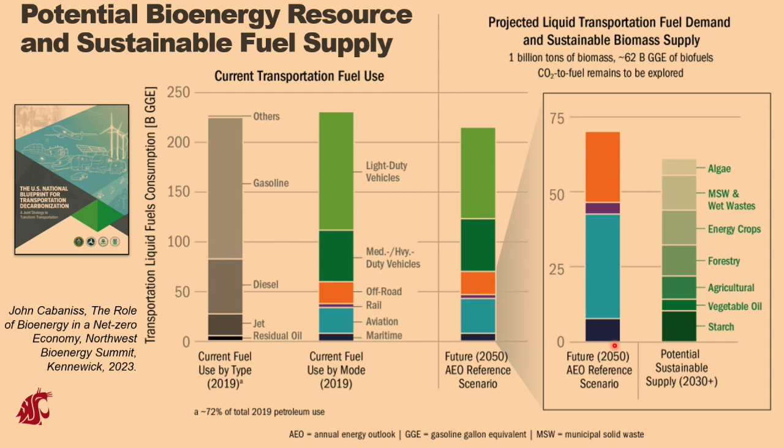And so this is stacking up a 2050 liquid transportation fuel comparison versus the amount of potential sustainable biomass converted into transportation fuels. Again, this is a lot of if, but it shows potential. So basically you can see where the biomass eclipses the combination of rail, aviation, and marine, but not all of off-road or diesel or gasoline. Okay.

So another thing that is really, really driving a lot of commercial activities within the US and Europe are the different regulatory practices. So the US passed the Inflation Reduction Act. If you're an engineer that cares about sustainability, the Inflation Reduction Act should be top of mind when you think about the rollout of renewable technologies across the US.

And that model for the Inflation Reduction Act uses carrots. It gives you a benefit when you reduce your carbon emissions, okay? So for every gram of CO2 you reduce for your SAF, you get a certain benefit for it. It's an incentive-driven program. European models are a bit different, where sticks are typically what's referred to there. So you have to pay if you do not meet certain targets.

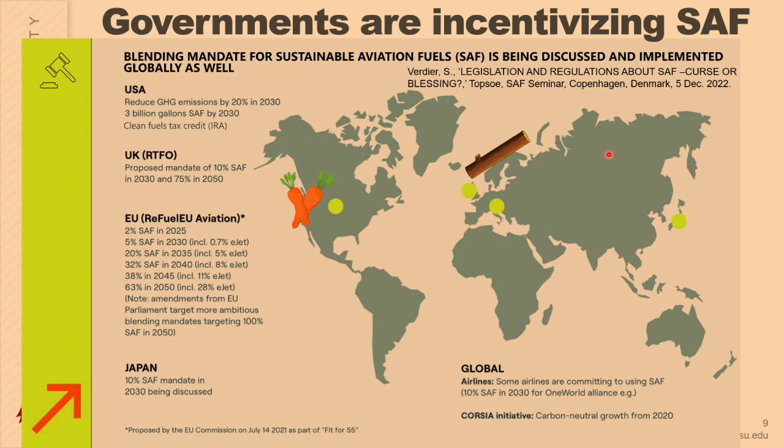So for those of you that work in dynamic systems, this is a very interesting problem. Because in theory, if you meet the sustainability targets of both the US and the EU, you may be able to make your fuel here and ship it to Europe. And that may happen or may not happen. The amount of commercialization projects right now in the US is a lot when it comes to SAF. And I'll talk a little bit on the next slide about some of that. But these policies are driving a lot of what the commercialization market looks like at the moment.

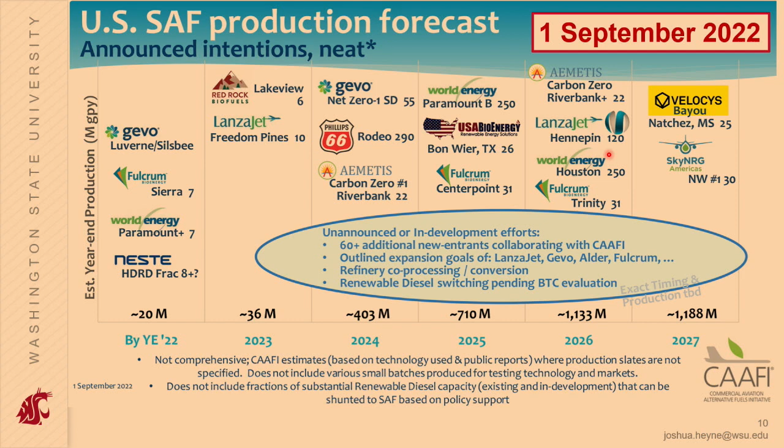There's a whole mix of technologies that are on this slide. There's alcohol to jet, there's Fischer-Tropsch from municipal solid waste, there's taking used cooking oil and other oil routes and hydrogenating it and producing SAF. So there's a lot of technologies at play, a lot of feedstocks at play, and a lot of things are changing simultaneously. But right now, that's as good of a picture, and it's a very dated slide. A lot's changed since 2022, but it's hard to pin down exactly what's going on with much prediction certainty. So, all right.

So a bit more about what we do in my lab. So as a basis, safety first, safety last.

If you think about the safety in terms of fuel, it's kind of like a Russian nesting doll for aviation fuels, where at the core of the safety is the fuel itself. And the fuel itself is defined with a specification. That specification then helped design the engine, what the engine can do. The engine then defines what the aircraft can do. The aircraft then defines what airlines or operators can do.

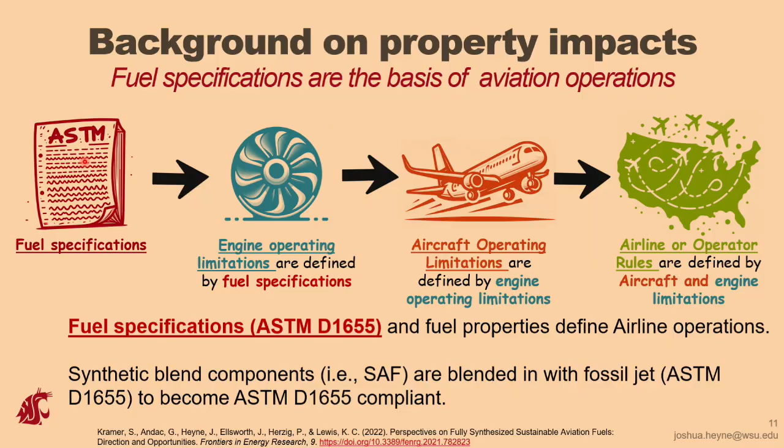And so, you can think about this initial Russian nesting doll. The importance of that propagates to all these other processes that are important for SAF. And so what has to happen is any SAF molecule, any renewable carbon, right now has to meet this original specification. The way that it meets that original specification right now, so that's the specification ASTM D1655, is you have to blend a fossil kerosene blend component with a renewable carbon blend component.

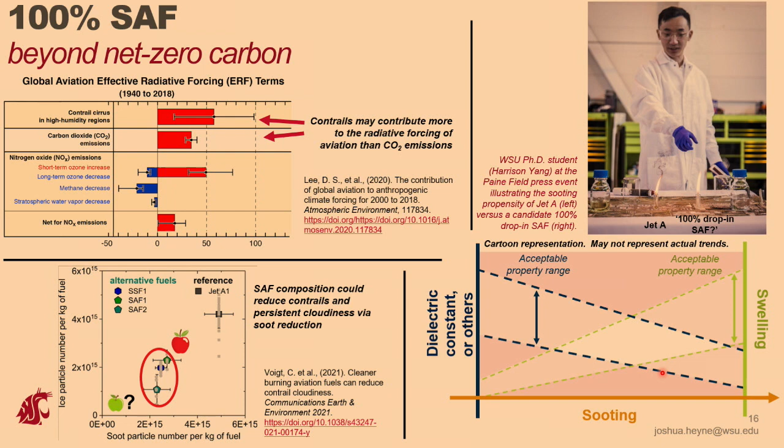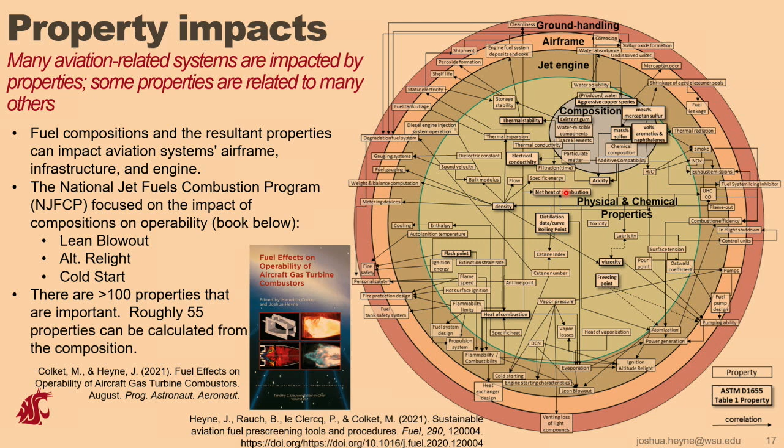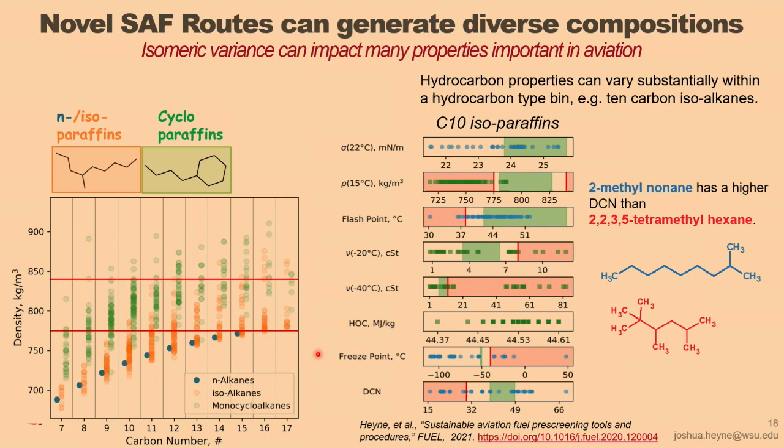So here's the density range for Jet A. The upper limit is the red line, lower limit's this lower red line. And you can see that different isomers can have dramatically different densities for the same carbon number. So what we do in the lab is we receive and try to identify very specific isomeric compositions. So this is a fuel that's undergoing qualification right now called synthetic aromatic kerosene. And so we did a study where we wanted to try and identify specific stereo and structural isomers in that fuel and then predict the properties.

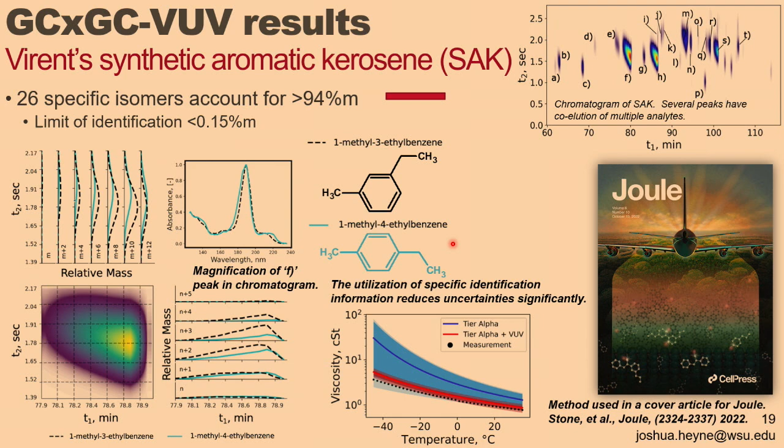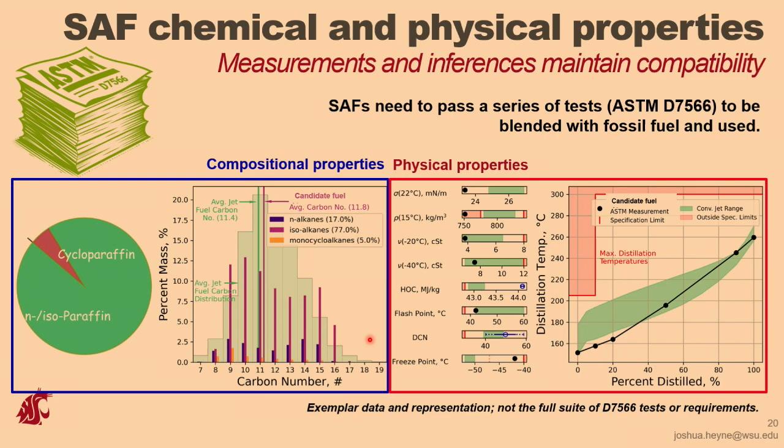And then, sometimes a producer could have a very high carbon number in there, and you say, okay, you have a lot of C18 molecule. You need to remove that. Oh, well, if we change this catalyst condition, then we can change that composition, or if we change this or that, we can move these things around. And then once they do this, they're able to accelerate their technologies much, much faster.

A key concern for getting rid of aromatics and minimizing sooting is the dielectric constant. The dielectric constant is using capacitance gauging. And historically, there's been just a few databases that illustrated the relationship, this Clausius-Mossotti relationship of the dielectric constant -1 versus the dielectric constant -1 over density. And, what is the impact of sustainable aviation fuel composition on this relationship?

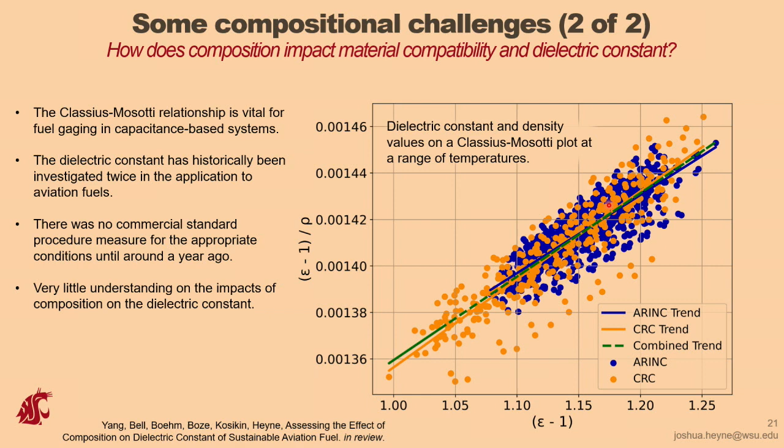The gauging systems have been built around effectively this line. What happens when we change the composition? And so, this is just some of the stuff that we do in terms of predicting things. And it turns out that there can be dramatically different dielectric constant measurements across various sustainable aviation fuel streams.

So this sort of information is really important. Okay, we can have 0 to very little aromatics in this fuel and still meet the dielectric properties we need, still hit the soot, so on and so forth. But we do a lot of this type of work.

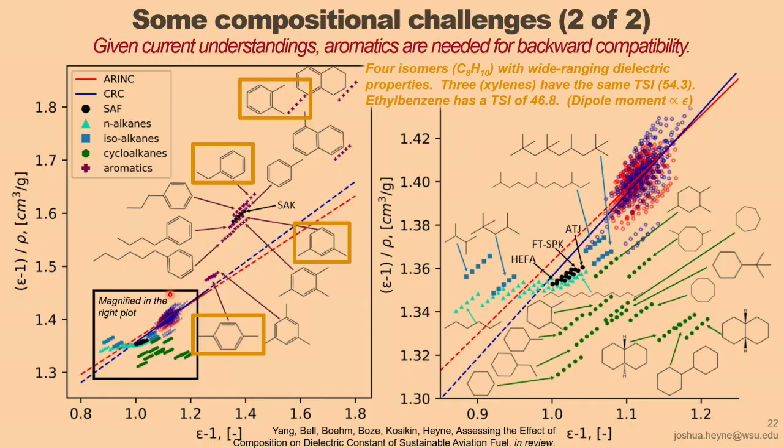So I just wanted to highlight a couple different collaborations we've had. Over the last several years, this is some work with Captis Aire, Kim Tutin. Kim's been working on a technology where they capture terpenes from wood drying. So in the southeast, when they dry lumber, terpenes come out of that drying process, and it's an EPA-regulated emission. That means they cannot just exhaust these terpenes into the environment. They have to get rid of them. They have to burn them or capture them some way before they can emit this effluent.

So what Kim has developed is a technology to capture the terpenes and upgrade them into aviation fuel. It's not going to solve the SAF Grand Challenge, but 40 million gallons a year is still something, right? So her technology is able to reduce the amount of natural gas that is needed to burn these terpenes before they can be emitted while producing some sustainable aviation fuel.

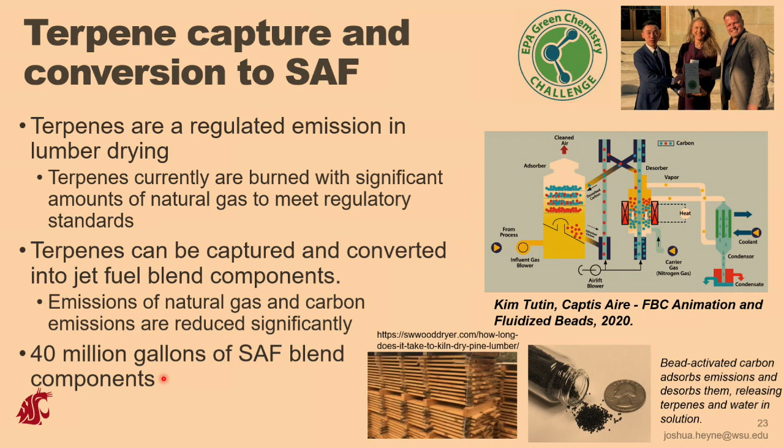Another technology that we're working with several partners on is hydrothermal liquefaction. So this is where you take human waste and you convert it to jet fuel.

And the algorithms are working when this is like my suggested news feed almost every week about poo in Britain, because this company is a British company and I get recommended to read these articles all the time now.

So, but it's an issue. There's leaching into waterways, crops. They will use sewage sometimes, treated sewage on farm fields, which then leaches into waterways too. It's a problem. So this company, Firefly, is one of the institutions we've been working with. So basically you take wet waste and you put it through hydrothermal liquefaction. You get this material, which is a biocrude that is very similar to fossil crude. You can upgrade that into jet fuel.

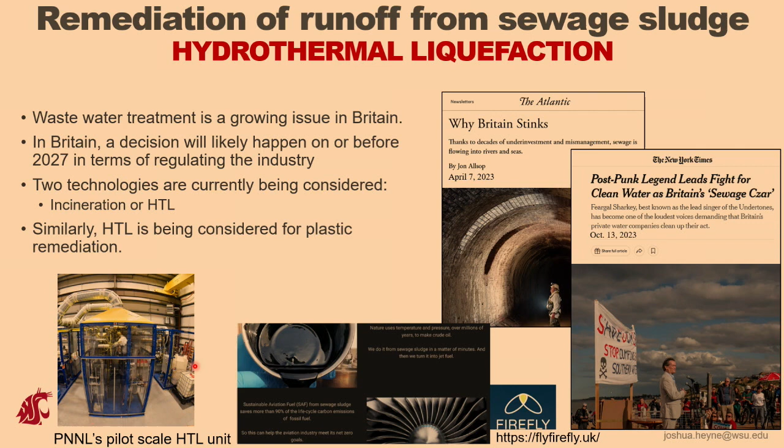PNNL has been a leader in hydrothermal liquefaction. They have a pilot facility in Richland. So we've been working with them as well on this technology. This is taking a liability and making it into some kind of asset. Very interesting stuff. Another company we're working with is Air Company.

We were not on their EPA Green Chemistry Challenge Award, but they also won last year. And so we showed up to the awards ceremony and it was embargoed and we're like, hey, we know Staff. So this is Stafford Sheehan, their CTO, and Anna Oldani, the chief scientist at FAA.

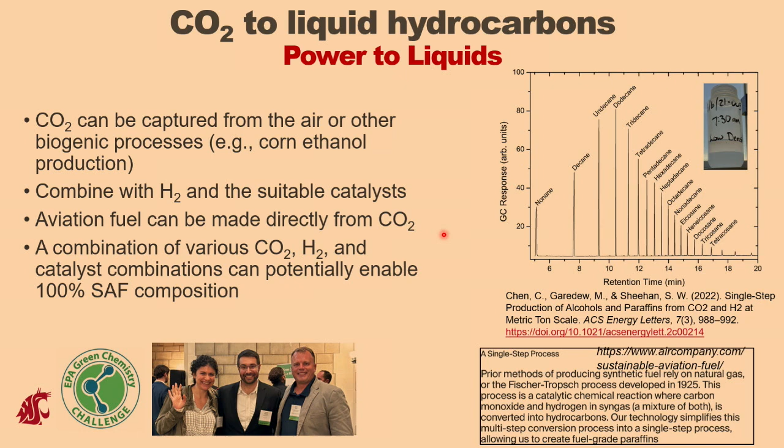And so Air Company takes CO2 and they have 3 commercial products right now. They have a hand sanitizer, they have a perfume, and they have a vodka, and they also want to make jet fuel. And so naturally, right? So that's another interesting example technology that I'm sharing here.

There's a lot of, no, I do have a slide on that later, so I won't go back. I'm just gonna click ahead.

All right, so a lot of people, when we're talking about non-drop-in fuels, ask what's the time horizon for those non-drop-in fuels, if ever? So this is just an illustration I put together where we have a bunch of aircraft right now that are flying on red apples, and they cannot fly on green apples. And if we want planes to be able to fly on green apples in the future, which minimizes the environmental impact, we need to do a number of things in the future. And so we have to develop a specification for non-drop-in fuels. This is an active area of work at the moment.

We need to design an airplane around that new specification, those non-drop-in fuels. We need to certify on those non-drop-in fuels, and then we need to start to build and disseminate or just use these green apple planes. And this needs to happen for quite some time before hypothetically you could switch over an entire infrastructure to this non-drop-in fuel. So this is something that could happen 2040, 2050, 2060. It's a very long time away.

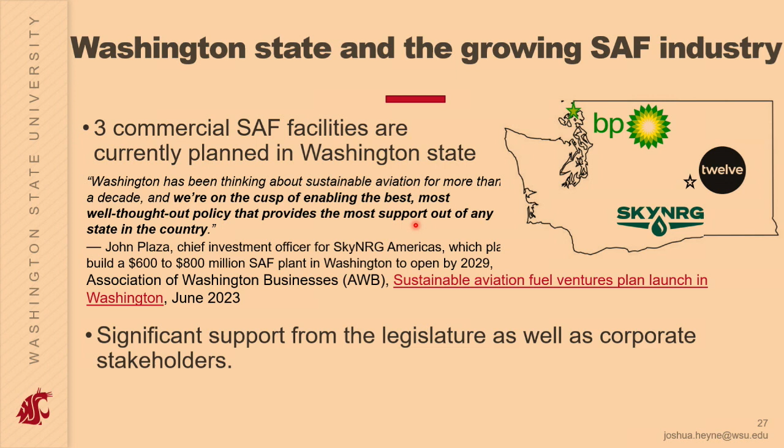Just 2 or 3 more slides. Washington State right now has a lot of SAF activity in terms of commercialization. There's 3 projects that have been announced, I think all within the last year, one with BP at Anacortes, one with Twelve. It'll be their first pilot facility in Washington State in Moses Lake, and then SkyNRG Americas is looking on the eastern side of the state. And because of the work of many predecessors at WSU, I think Washington has a very strong policy framework for SAF.

And then finally, in terms of our work, I'll mention that we're looking at developing facilities at Paine Field with Snohomish County. What we're looking at doing there immediately is developing a SAF repository. So what is SAF? Well, as I've mentioned, there's lots of different ways to produce it, right? Different feedstocks, different processes, different products. Like many other fields, we need reference materials to work with, right? And so the repository is looking to define reference materials for distribution.

So you know what a synthetic paraffinic kerosene is from HEFA, like a reference, and you can design your hardware around this. So we're looking at developing a sustainable aviation fuel repository. We have a temporary site located and a permanent site also located, and we're looking at seeing where we can take this long term.

And then finally, as an academic, it's always risky putting up things that aren't true, but still, I just think this is a very interesting analysis that Boom did some years ago, where it looks at the commercialization trajectories of wind and solar, in comparison to that slide I showed you earlier from CAAFI in terms of all these different commercialized projects.

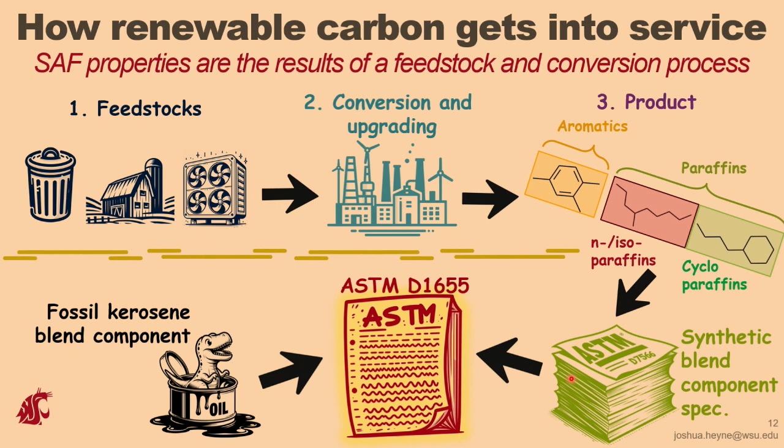You mentioned, on the slide with all the bananas and green and red apples, that the majority of the new fuels being produced are green apples. Are they currently being produced and combined with typical jet fuel, or obviously the goal is to have both green apples and bananas combined to make a similar type? Great question. So right now, those green apples have to be blended with fossil fuel at a certain ratio, at least. And then there's also a list of properties that also have to be met. But they're limited in terms of how much they can be blended into conventional fuel. 50% or less right now.

There is a drop-in 100% SAF specification that's being written right now as well. And so a few of these will be allowed. These red apples, there's another one, will be allowed in the near future for 100% drop-in SAF. Yep. Thank you. Yep.

Hydrogen has advantages that we like, but it also has some real substantial disadvantages. There's the cryogenic storage and the fact that it's not a dense liquid, so you need larger volumes for the propellant tanks. I've heard another aviation expert say he would put the emphasis on sustainable aviation fuel, that that's the more viable path forward, not hydrogen so much. Do you have an opinion on that? Yeah. So there's a lot of obstacles for any dual fuel airport or something like that, for example.

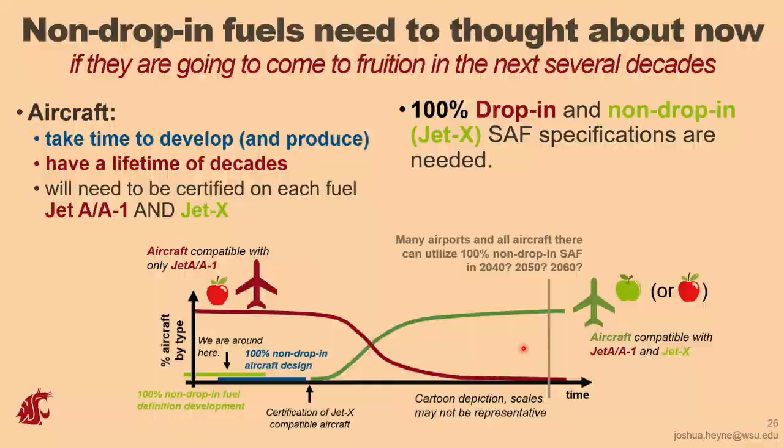There are technical, there's practical, there's a lot of challenges. So this is the slide I was getting to here for hydrogen aircraft. So there are advantages. One big advantage with hydrogen right now is that economically it appears to be cheaper than doing direct air capture and power to liquids. It's substantially cheaper than that. But yeah, there's a long road.

Direct air capture, you mean capturing CO2 from the atmospheric air? Yeah. And then upgrading that to an aviation fuel with an FT process or something. FT or the Air Company technology or Twelve, yeah.

I found that 8-year qualification timeline pretty striking, especially in light of the fact that some of these targets are within 7 years or 27 years. Is that backing up the pipeline yet? Oh yeah, already it is. Yes, it's something that I have spent a lot of time on, to be honest. 7 years trying to speed up that process.

We're doing work on trying to build other ways to get fuels approved through ASTM and stuff like that. I don't want to give too many details, but there's a pathway right now that's in this mix that, if it was approved, could be tens to hundreds of millions of gallons of additional SAF this year.

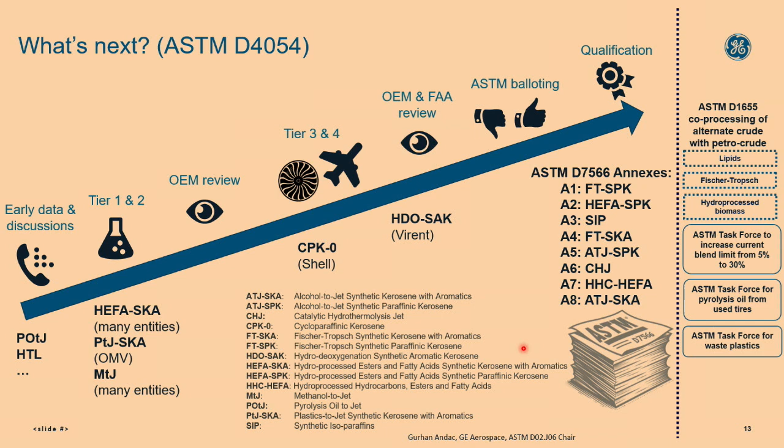And it's not happening because, and I don't want any, this is a very tough problem that we're very fortunate to have lots of very smart, hardworking people look at, but there's just a procedural way to do it. So, yep.

Actually, this is coming from materials too. Could you talk a little bit about the differences and advantages or disadvantages of hydrogen in either a fuel cell context or hydrogen combustion as it relates to aviation? And as a second question, you made a point toward the end about differences of a predominantly solar energy versus wind energy renewable portfolio being either good or bad for aviation fuel development. I would like a little bit better explanation for that.

Thank you, good questions. So in regards to those 4 different technologies, with batteries you're carrying your oxidizer with your fuel, so it's going to be hard to match the energetics of anything that doesn't carry an oxidizer. With hydrogen fuel cells, my understanding is you get benefits in terms of lower maintenance costs, and potentially cheaper fuel via electrolysis than some SAF technologies. So it's cheaper, but you may be limited in terms of your range versus SAF.

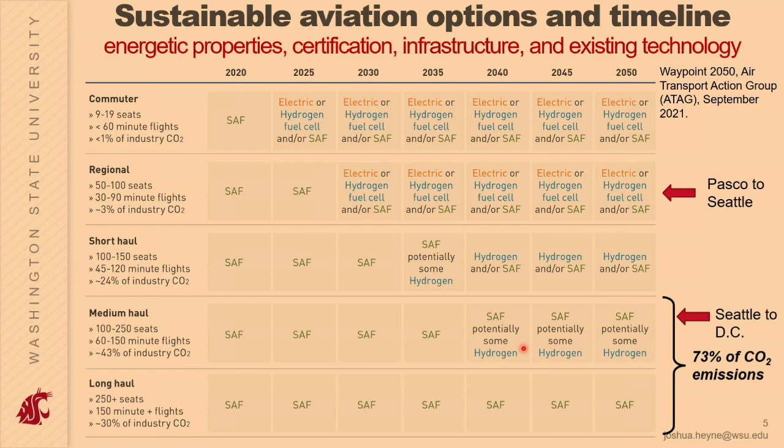Cryogenic hydrogen combustion, I would say the TRL is a bit lower. For both hydrogen fuel cells and cryogenic hydrogen you're going to have at airports a different fuel system, different ways to fuel the plane, to move people and goods on and off the plane. There's a lot of things that will have to change in addition to the TRL.

There's uncertainties in regards to hydrogen combustion and NOx emissions, which at least one paper I read suggested was worse than nvPM for cardiovascular health. Hydrogen combustion tends to have higher NOx emissions. And then you have the contrail impacts, which are uncertain because you're emitting water, which could form contrails more easily, but you're not emitting nvPM, which may not form contrails as easily. So there's work being done to predict or manage these different cost functions. That's just a few things to compare and contrast.

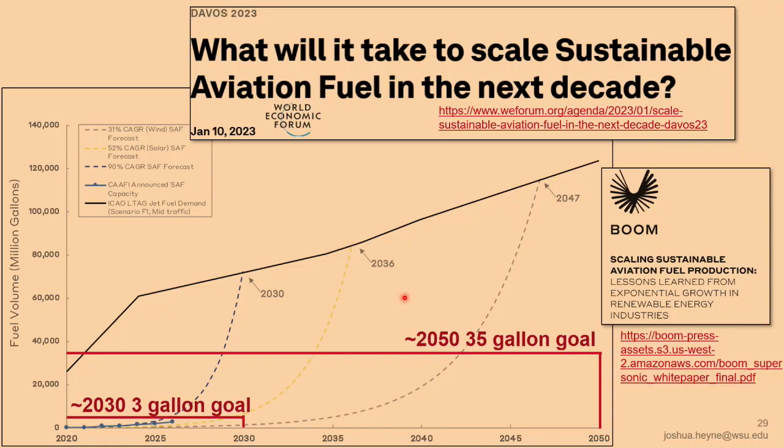Your second question, I apologize for not speaking clearly on this. This is referring to if you match the commercialization trajectory of wind and solar with SAF rollout. There's a historical annual rollout rate for wind and solar, and if you map those onto the projected SAF capacities I showed earlier, these are the two lines you get, the yellow and the gray, mapped onto what data we do have for SAF.

So in other words, the solar trajectory would provide the energy to make a SAF transition feasible? It's just how fast did solar roll out, and we take that trend line and put SAF data on it. It doesn't have to do with how much energy you're getting from these renewable technologies. Oh, okay, so you're comparing those as analogies for how SAF would develop. Yeah, how fast could we expect SAF to develop if it matches the commercialization trajectories of wind and solar? Is the current investment in SAF in line with either of those?

So the interesting stuff, the numbers are just gigantic, at least in terms of my own mind, in terms of how much money it costs to do this stuff. So for the facility, the SkyNRG facility, roughly $600 to $800 million for a 30 million gallon facility. That's how much it costs. That's a good amount for 30 million gallons, which is effectively a thousandth of what we need.